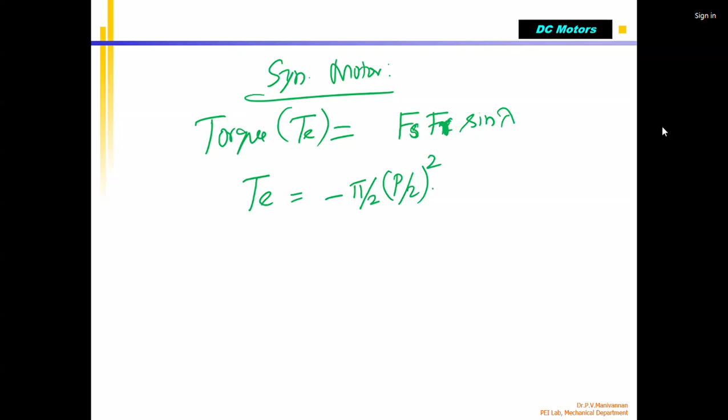Fs multiplied by Fr multiplied by sine of lambda. Already we know what that is. Now, if you want to write the final formula, TE can be written as pi by 2 into p by 2 whole square multiplied by phi R. I am using capital R.

Please see here, this small r. Fs multiplied by F small r into sine lambda can again be written like this. Phi R is the resultant magnetic field, capital R, multiplied by Fr multiplied by sine delta subscript r, so many Newton meters. Already we know the unit is Newton meter.

So this can be written again. TE can also be written as pi by 2 into p by 2 whole square into phi R, Fs sine delta S also, so many Newton meters. Both are the same, because if you see the figure, the total angle is called lambda.

The total angle between the stator magnetic field and the rotor magnetic field is called lambda. The angle between the resultant magnetic field vector, this is FR, the middle one, and the stator field is called delta S. Similarly, the angle between the rotor magnetic field and the resultant magnetic field is delta R. So there are three angles you will generally see in this figure.

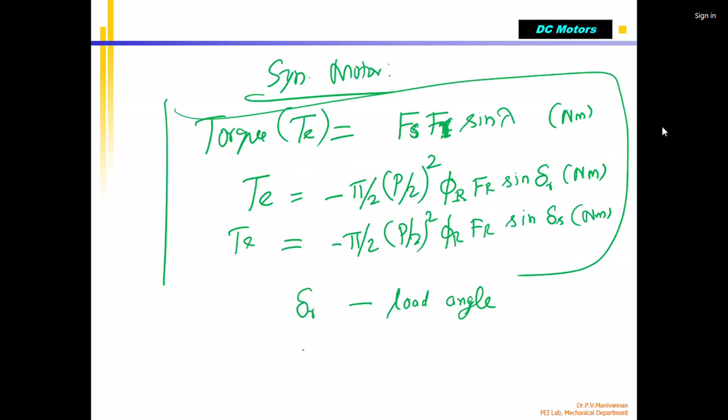One is lambda, then delta R and delta S. Based on that you can write the final equation. You can use any one of the equations to compute the torque generated by the motor. That is one thing. The next thing is, delta R is called the load angle, and delta S is also called the load angle, because it is with respect to the resultant.

The load angle is measured either with respect to the stator and resultant magnetic field, or between rotor and resultant magnetic field. Both formulas are the same, so you can use either one. In one we use delta S, in the other delta R - the angle between resultant magnetic field and rotor, or resultant and stator winding. Otherwise, we use Fr, Fs multiplied by sine lambda. This is called the load angle, or torque angle. Lambda is called the torque angle - note this down.

If you are given the torque angle value, Fs and Fr, you can compute the torque of the synchronous motor using this formula. Instead, if you are given delta R or delta S, and phi R is there, P is number of poles, pi is constant, then you compute using this formula. This equation can be further written as minus pi by 8 into P square, since P by 2 whole square is P square divided by 4, and denominator already has a 2, so 2 into 4 is 8. That's why it becomes pi by 8 into P square into phi R, Fr, sine delta S, or you can substitute delta R - this also gives the final result.

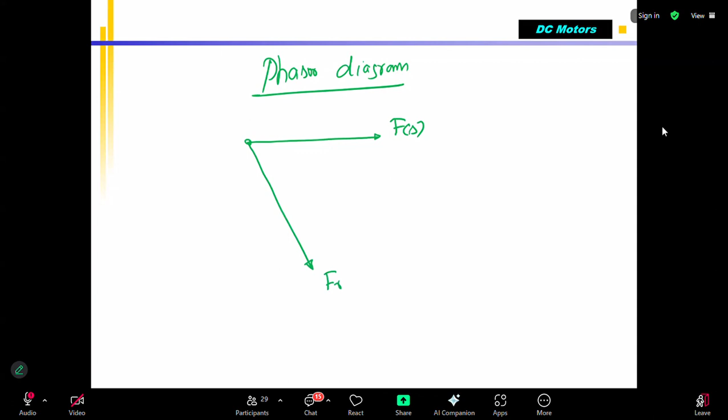Before closing, I want to cover this. Generally when we talk about this kind of AC motor, there are two magnetic fields working. How do we compute the resultant magnet? They use what is called a phasor diagram to explain the motor working and torque generation. For example, the stator magnetic field is denoted Fs, shown here. Then my rotor magnetic field, this is my Fr. Then the resultant magnet is going to be like this.

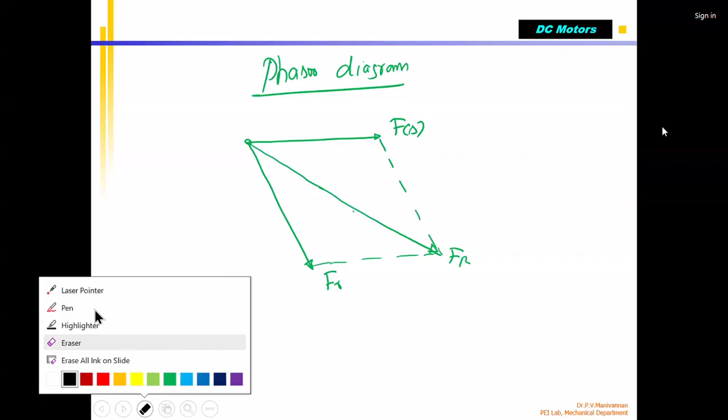So generally these two... let me redo this. The resultant magnetic field is going to form a parallelogram. So this is our Fr. And as I told you, this angle is lambda, called the torque angle. Then the angle between this is called delta R, and similarly this is called delta S.

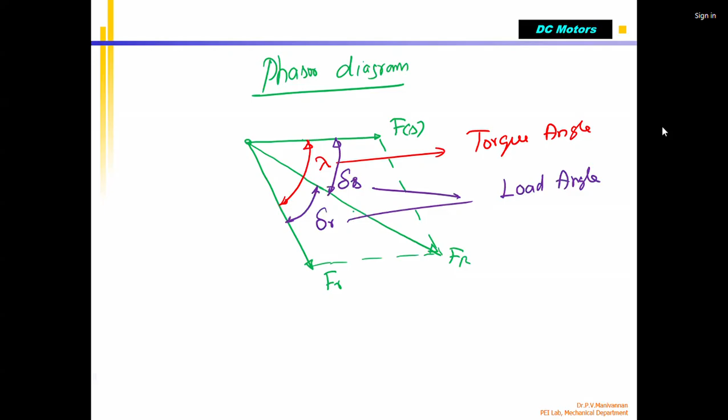Both are called load angles. Load angle means - if you recall the motor working as already explained - the rotor is connected to a load. The load has mass, so it has inertia. So the rotor wants to rotate along with the stator magnet, since it is a magnet. The rotor magnet is locked with the stator magnet, and the stator magnet is rotating - a rotating magnetic field at synchronous speed. So it has to go, but because of the load, the rotor cannot catch up.

If I see the magnetic flux generated by north and south pole - this is the rotor, this is my stator, in which there's a north pole and this is the south pole. Between these two, the magnetic flux generated is attracted - this should be south pole, this should be north pole. This magnetic field wants to go and join, get attracted - that means the rotor realigns, trying to catch. This fellow is rotating - both north and south pole rotating in the stator at Ns, and the rotor magnet wants to get locked with this, so it has to align exactly like this.

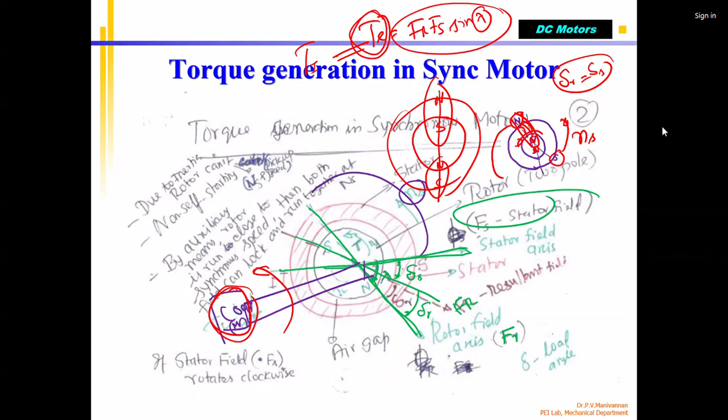Thus, when the inertial load is more than the torque generated, the motor stops. We call that stalling torque.

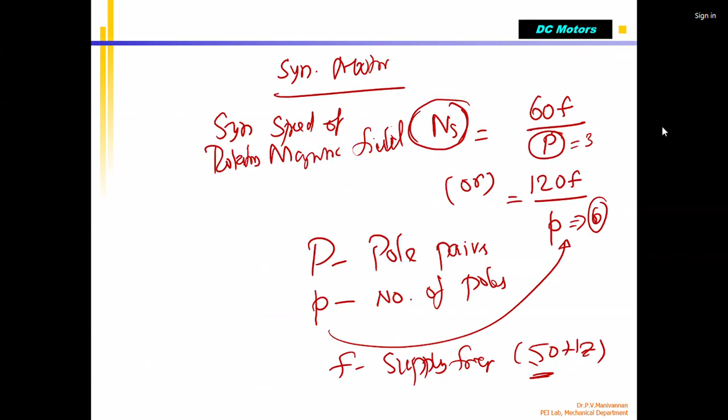Okay, so I have one question. Yeah, yes please. Can I ask, sir? Definitely. The equation that you have written is basically Fs into Fr multiplied by sine lambda, right sir? Yes, that is called the torque angle.

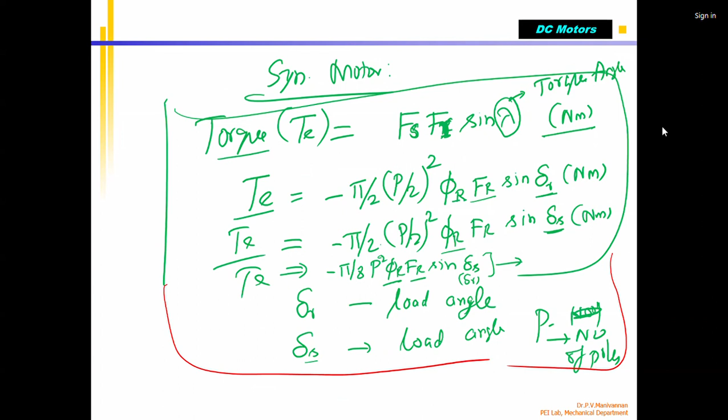Lambda is basically the load angle or torque angle, whatever you call it. Lambda divided by 2 because this load angle is different - this is called torque angle, lambda is called torque angle. This is the torque produced by the motor. Load angle is delta.

Right, so my question is - yeah, please. Okay sir, so my question is that when the fields are aligned completely, what I mean to say is when the stator is exactly in phase, like there is no... Then this will be zero, I would say lambda will be zero. The torque will become zero.

Motor will stop. Yeah, I understand where you are going. Correct, if the angle becomes zero, there's no torque produced. There is always something because the stator magnetic field has no mass, but the rotor has a mass. Correct, because always there will be an angle.

In no-load condition also, this lambda torque angle will not be zero, because the rotor has some mass. That angle exists because it cannot exactly align, because it is always trying to catch up.

That's why I told you, to start the synchronous motor you have to rotate the rotor physically, because it's already magnetized - you give DC voltage, north and south pole is there. You rotate this close to synchronous speed, correct? The rotor is rotated using an external motor, so that at one stage it will catch and align.

But even once it catches, because of mass - you remove the starting motor, but the rotor still has mass - rotor mass, because of that, it will lag. The speed will reduce a little bit. So never will this become zero. If it becomes zero, the motor will not be able to produce torque, correct?

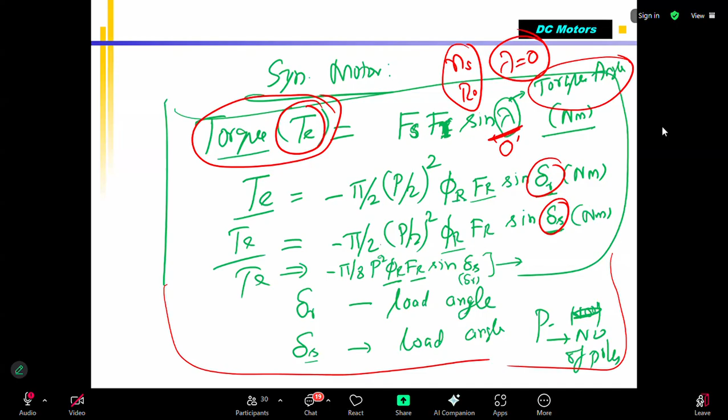So there will always be a little lag - the rotor mass itself acts as a load even in no-load condition. In actual load condition, because of that, lambda will become more and more, correct? And that divided by 2 is going to give the load angle - load angle resultant plus this one, that's what we are talking about. Thank you for asking that question.

Okay, so now that you know the formula, Fs we know, correct? Now I want to draw how the torque, power, and speed curve looks. Generally, when we talk about motors, the x-axis will be speed, generally omega in radians per second, correct? Angular velocity represents omega, correct?

From this, now I want to draw what will be the speed-torque curve for this. So one curve is called the torque curve. For a synchronous motor, the torque will be like this.

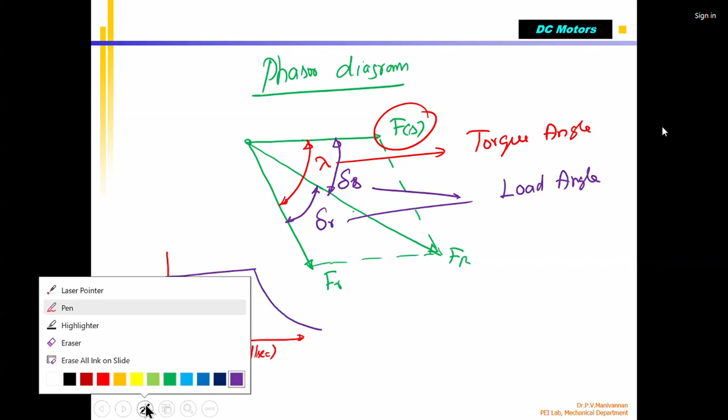This is the TE, torque generated by the rotor. After that, you have frictional torque, bearing torque, all those things going to consume. Resultant torque only going to drive the load. That we'll see.

As synchronous speed, already we see that this speed is called W base. And as you increase the load, this one goes on increasing. So at one stage, load becomes more, then the motor will stop. That is called omega max.

You can see that from 0 to W base, the speed-torque remains constant. I told you it can take load up to a particular phase. Once it becomes more, the speed starts dropping. At a particular load, then it will stop. That is called W max.

The x-axis we are talking about is speed of the motor, in omega radians per second. Y-axis we are talking about power as well as torque, drawn on the same axis. For synchronous motor, I have drawn the torque curve in violet color. The power curve will go something like this, for the synchronous motor.

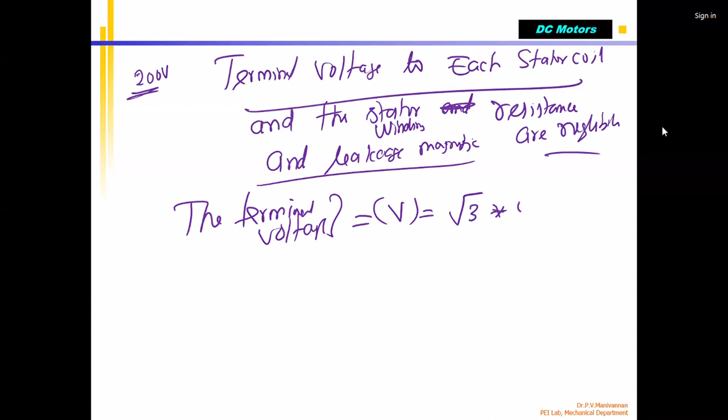So when we apply a fixed voltage, and the stator winding resistance and leakage resistance are negligible, very small value, then the terminal voltage can be written as V equals root 3 into 4.44 into Kw, because everywhere the multiplication factor is there, multiplied by F into phi R into NPH.

Since root 3 comes in, this is a three-phase motor, root 3 is a constant for three-phase motor, and 4.44 also is a constant. Kw is the motor-related parameter. If these parameters are given, then you can find the terminal voltage.

So now finally we can write T, torque generated by motor, equals K into delta R. Delta R is nothing but the load angle, sine of delta R, into K, where K is called the motor constant. It depends on pi by 2 into number of poles, phi R.

For a given motor, the manufacturer may give the motor constant, as synchronous motor. Once that value is given, you only need to know the delta R, or which is same as delta S. Multiply it by sine of delta, you will get the torque generated by motor. This is how you calculate the synchronous motor torque.

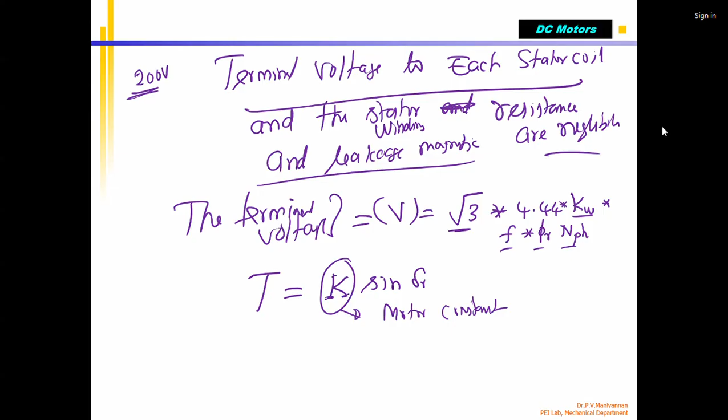Okay. So the curve is going to be: torque is in the x-axis, starting from 0 to T max, the maximum torque the motor can produce. Then this is the speed of the motor. The maximum speed it can reach is ns. You know that, correct? A synchronous motor can reach 0 to ns.

This is the maximum. So it will maintain speed until the load torque becomes more than the maximum torque, correct? This is the maximum torque. Then speed will become 0. You can see it suddenly drops. Theoretically, speed is maintained constant from no load, the no load condition of the motor, to the maximum load condition T max. Up to that max load condition, the speed will remain constant.

Even as you are putting more load, the torque will be generated by the motor. And once the torque reaches T max, after that, if you try to load, what will happen? The motor will stall and the speed will become 0. That's what this represents. Okay.

So where is the application of the synchronous motor? Main thing is, wherever constant speed is to be maintained, even when load is varying from no load to maximum load, correct? Where a constant speed drive is needed, you will use a synchronous motor.

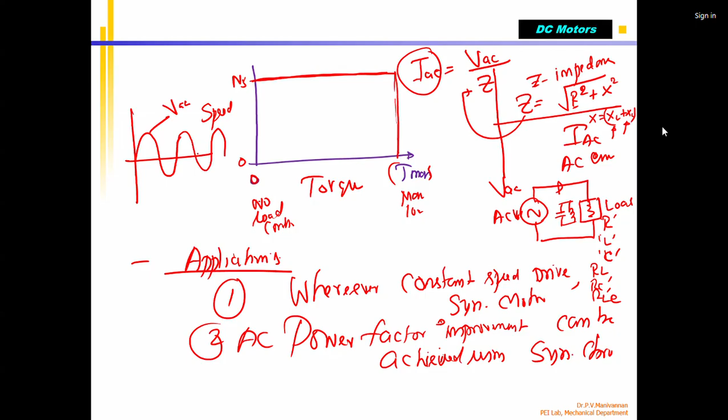Once IAC, but the problem is, I am applying the AC voltage, which is sinusoidal, correct? Generally we represent this as my VAC. This is my time axis, T equal to 0. This is the amplitude, plus V, minus V. And how will the current flow through a resistance load? If the load is a pure R only, the current will be like this.

You can see that there's no phase angle. Voltage and current are aligned, but amplitude differs: this is my IAC, this is my VAC. The shape is also sinusoidal, and it is in phase. This is 0 to 180 degrees, 180 to 360 degrees, one cycle. You will say current and voltage are in phase. In the best case, only the amplitude will vary, but they will be in phase.

If it is inductive, this is my VAC, IAC. I say that it is inductive, right? Then what will happen is the current will be like this.

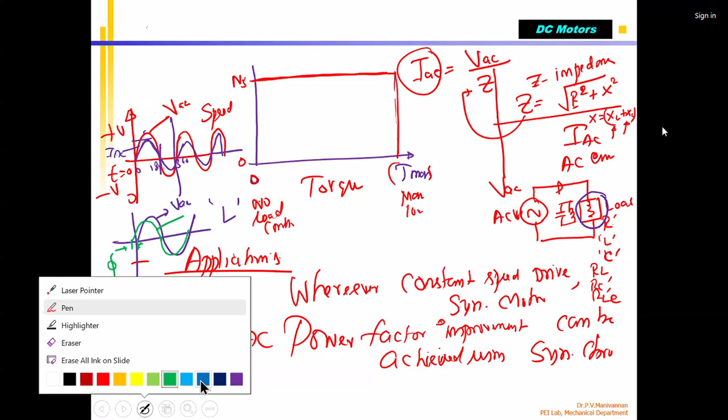Okay, so it will be. So now you see that there's a phase angle. This is called phi, which is called the phase angle. Okay, this is for inductive load. Instead of that, if I have a capacitive load, my voltage is like this, my current will be flowing like this.

So this is my IAC, this is my VAC. You can see that there's a phase angle, phi. Correct? This is called a lagging phase angle. This is called a leading phase angle. Inductive load, there will be a phase difference, apart from amplitude difference, but with a resistive load, both will be in phase.

And if you have an RLC circuit, depending upon R value, L value, C value, the Z changes. When the Z changes, automatically a phase angle change also happens. There's a formula for that. But generally, in AC, both voltage and current should be in phase. That means there should be pure resistance. The denominator should be a pure resistive load.

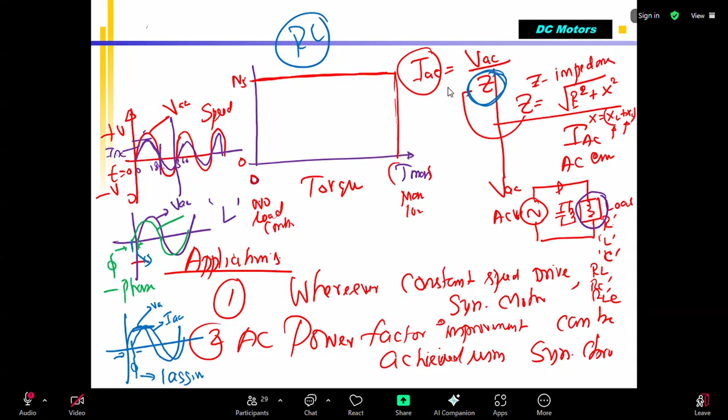But a synchronous motor has a coil, so it has inductance. Coil is made of copper wire, it has resistance, so it is called an RL circuit. Even though it looks a simple coil, all motor coils here, armature coil, rotor coil, stator coil, field coil, are all copper wires. But once a straight wire is wound as a coil, it attains L, inductance comes. And since it is made of some material, copper, aluminum, it has resistance also.

So a coil cannot be considered pure inductance. A motor coil should be considered an RL circuit. Because of that, a phase shift happens. If more phase shift happens, we get what we call reactive power. If phase angle phi becomes more, reactive power increases, and that is not good. Active power is the only measurable quantity. So the phase angle should be reduced.

So if you have an inductive load motor, I have a coil which is represented by resistance together, and I add one capacitor. This is my actual load connected to AC power. A voltage is applied, IAC is flowing. Because of it, there's a phase angle, and reactive power comes into it. We say VAC multiplied by IAC into cos theta, where theta is the phase angle. So PAC equals VAC multiplied by IAC multiplied by cos theta.

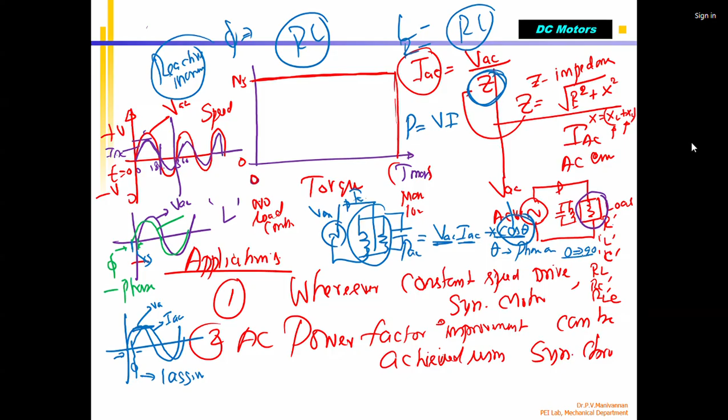But in case of pure DC, P equals V into I. This cos theta factor will not come. Cos theta is represented as the power factor. Theta will vary from 0 to 90 degrees only, so the cos value will vary from 1 to 0. If cos theta becomes 0, the power is called pure reactive power.

In case of pure resistance, theta will be 0, cos 0 equals 1. That means if I connect a resistive load to AC power, it works as pure active power. Power factor becomes 1. But in case of a motor, the angle will not be 0. It can vary from 0 to 90. Because of that, there will be reactive power, which should be compensated. How? You have to make theta equal to 0.

What I do is, across the motor, I add one capacitor. So in your fan motor, there will be a small capacitor. It's a starting capacitor, they say. That is to reduce the phase angle, so the power factor improves. So a synchronous motor can be used for making theta equal to 0. The power factor angle should be 0.

So in big factories, for example a plant, maybe hundreds of motors, then tube lights which have chokes, then fans to circulate air in the factory. That means a lot of inductive loads are connected. In that case, the power factor will become lesser and lesser. So to stop that, they put capacitor banks. Otherwise, they can put synchronous motors.

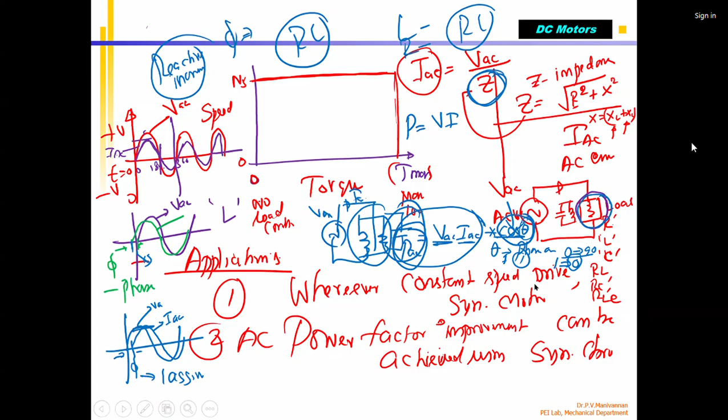Pradeep, can you please mute your... Pradeep, listen to this class. Don't listen to some other class in parallel. You won't understand both. You are seeing some video or some lectures. This is not going to help you in your exam. Beyond that, I am not going to say anything.

Okay. The last thing I want to say is, there are two types of synchronous motors. Note down. Synchronous motors are of two types based on the type of rotor. I already told you, I draw the stator body, in which you have coils, three-phase wires, embedded.

Three-phase AC, this is my stator. Correct? Stator coil, stator body is made of laminated core, and you are supplying three-phase AC voltage. Then you have a rotor. We are seeing a cross-section of this one, in which again there are coils. I am saying just some 4 sets of coil. A coil is there everywhere, and current is entering like this. Since this is a cut section, we are seeing current entering into the coil, and here it comes out.

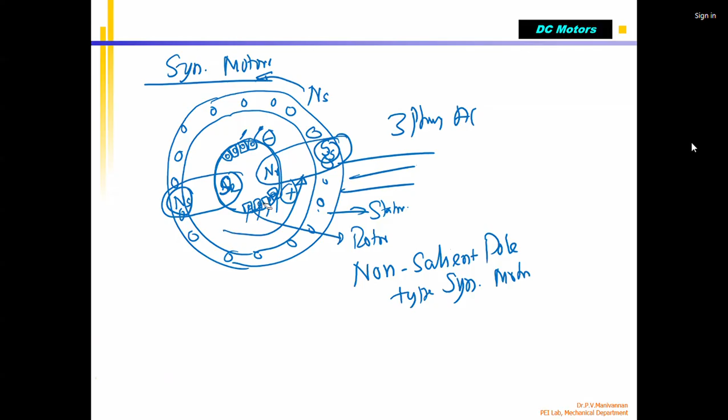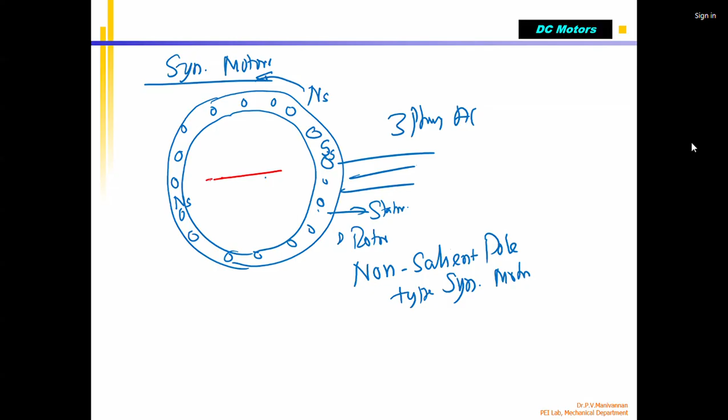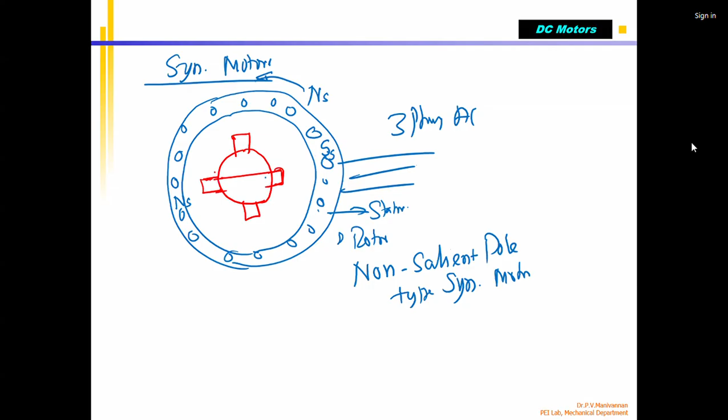Okay, other than this one, the other one is called salient pole type motor. Okay, so circular in shape, but there are projections. Many times they show it like this. Coil will be wound over this. These are called pole pieces, correct? Please note that in the non-salient type also there were poles. Poles are created by the current flowing through the coil of the rotor, but it was cylindrical shape, no projection, with grooves in which the rotor coils are embedded.

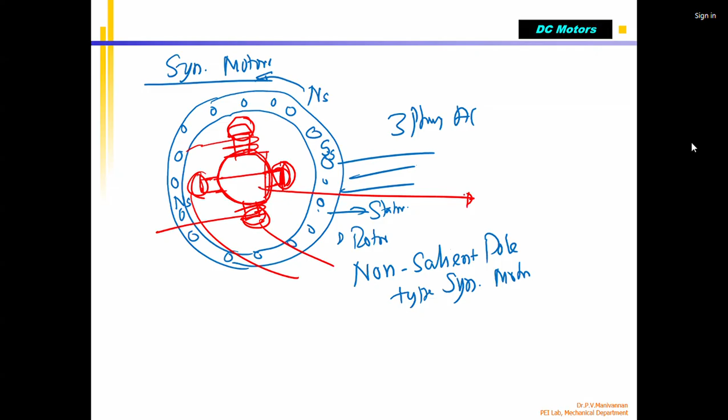Okay, in this case, you can see that this is cylindrical, but there are projections, correct? And the coil is there. This type of rotor is called salient pole type. Poles are projecting from a cylindrical shape. From that, there's a projection, correct? So this is called the salient pole. And both types of motors are available, correct? They have some advantages, also disadvantages.

I think time is already up. Maybe I close this. Maybe just another few minutes.

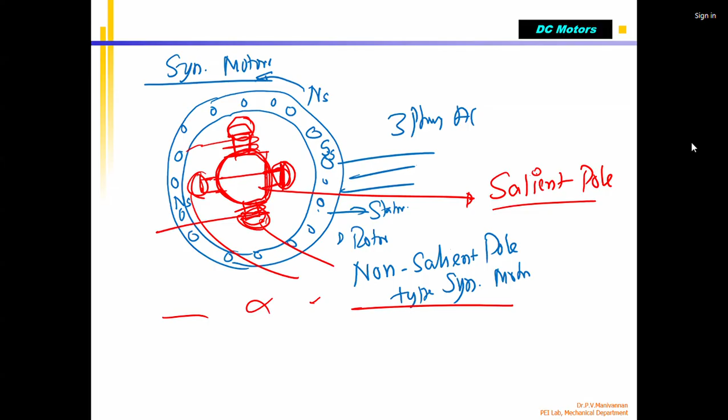I will close it. So both types of synchronous motors are available. Salient type, in which the rotor poles are projecting outside and coils are there. Of course, the main part is a solid cylindrical shape, but there's a projection. This is called salient pole. In the other one, the rotor has no projections, cylindrical solid with grooves, and that is called non-salient pole. There are some advantages between both. Okay, I will draw the advantages. One is called non-salient pole type, note down, the other called salient pole type.

First thing is the rotor diameter. The non-salient pole has a smaller rotor diameter. What I'm saying is, generally it will be in cylindrical shape, right? So this is the shaft coming out. There's a bearing, right? Here there are grooves, right? The rotor has some length and it has some diameter also.

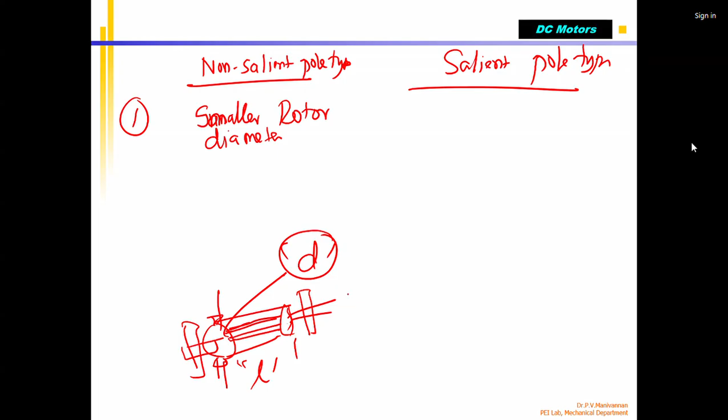Correct? So the non-salient pole motor has no projections, and it will be smaller. The diameter D will be smaller for the same power, same torque compared to salient pole type. Non-salient pole, the diameter will be small, but the rotor length will be longer. So smaller diameter, longer length. Okay.

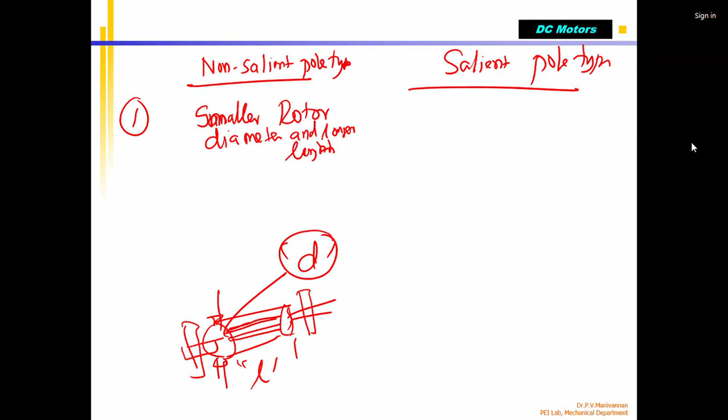Then there's a uniform air gap, correct? I told you this is my rotor, this is my stator. There's a gap in between, correct? Because this is a cylindrical shape, there's a uniform gap, so air will be sucked in. I told you there'll be a fan attached to this, and it will suck the air to cool the motor. Air will be going like this in the gap. So since there's no projection, both the stator and rotor are cylindrical with a gap, the windage losses.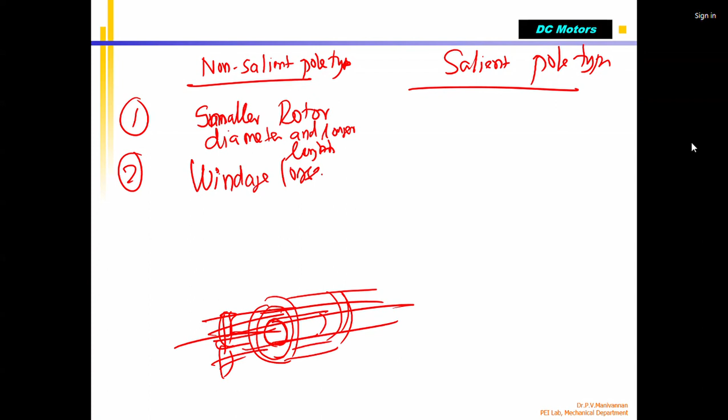Because air is sucked in, correct? Air is sucked in by the fan and comes out, correct? That is going to smooth the gap and cool this one. So windage losses will be less because there is no projection. We're not going to create turbulent airflow. Windage losses will be less.

Okay. Then it is a robust construction, correct? Please note that it is a robust construction because it is a solid cylinder with grooves only, no extra projections. So when the rotor rotates at 2000 RPM, 3000 RPM, the centrifugal force created will not have any effect, correct? It is highly balanced. So robust construction without any projection. So it can run at high speed, correct?

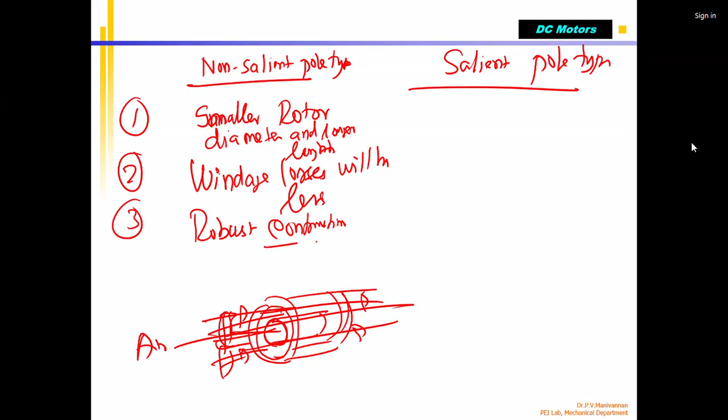Non-salient pole synchronous motor generally 3000, 5000, 6000. But please note the speed. NS equal to 120 F divided by small p, correct? So you can give higher frequency to attain higher speed, 3000 RPM, 5000 RPM for a given number of poles, correct? So 120 is a constant. If I vary the input supply frequency, I can go to any speed. For a given supply frequency, it maintains a constant speed, correct?

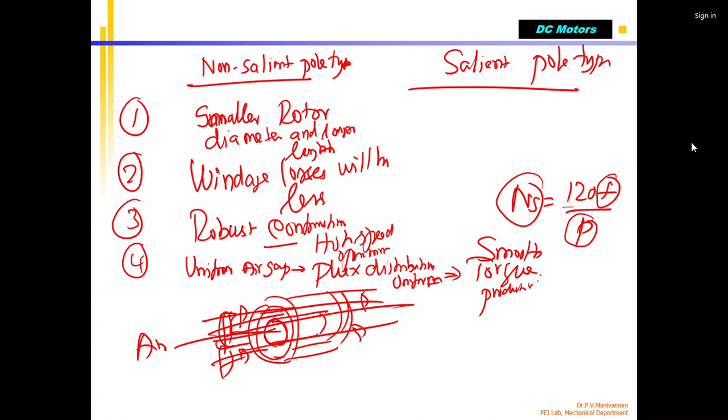So since there are no projections and robust construction, high speed operation is possible compared to salient pole because there's a projection. Okay, then the last one is because uniform air gap is there. Due to uniform air gap, correct, flux distribution will be uniform. Because of that, torque production will be smooth. As the rotor rotates, the torque is going to be smooth torque production or uniform torque production at any given angle because there is no projection.

Okay. Then, as I told, high speed operation is possible, correct? Generally a high speed synchronous motor will be a non-salient pole. High speed operation, because it can withstand higher centrifugal force. Since there's no projection, it is a solid uniform shape, it can withstand. So for high speed operation, you have to go for non-salient pole type only.

And again, last one is well balanced. Mass balance. Being a cylindrical shape, correct? It is well balanced and minimal vibrations. Okay, this is the advantage of non-salient pole type. Okay, so what about this one?

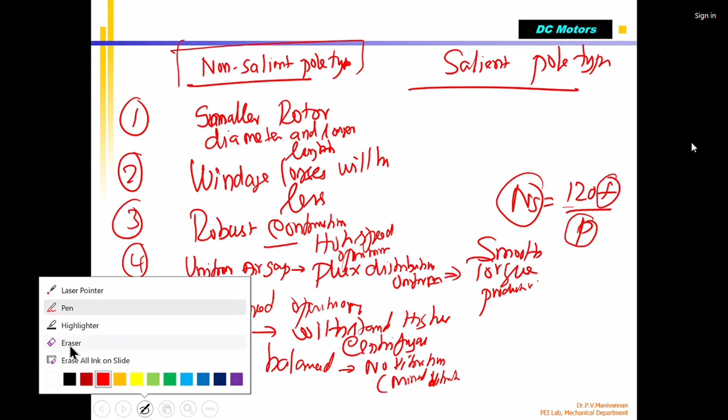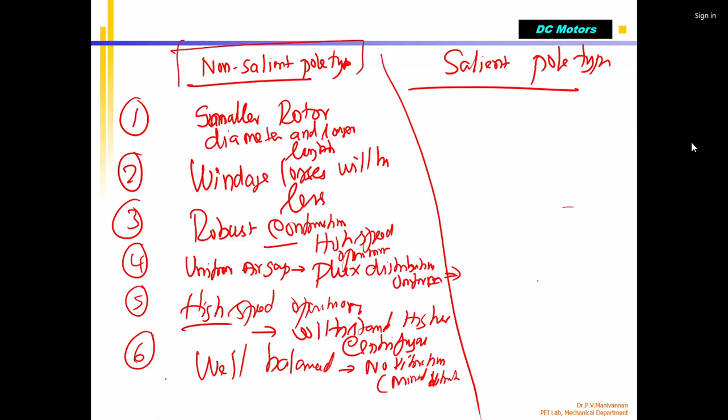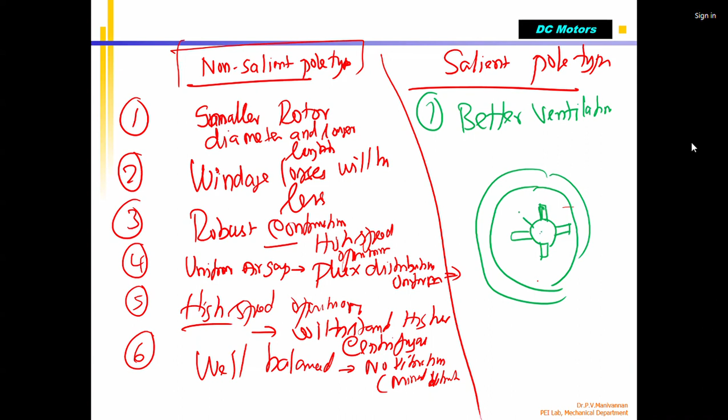Salient type, better ventilation. Because there are projections. I told you, I have the rotor, there are projections. And this is my stator. Correct? Because of projection, a large gap will be there. This is air gap, correct? So that means more air can go. Better ventilation is possible. Cooling will be better in salient type.

And of course, it has a drawback. It will be a larger diameter. The motor size will be larger because of the poles. Then third one is the pole faces. This is my pole face, correct? The projection they call pole pieces. The face will be shaped such that the magnetic flux is uniformly distributed. Okay.

Generally used for low speed operation. Because as I told you, poles are projecting. If you run at higher speed, it will experience a lot of centrifugal force. The pole pieces can create a lot of centrifugal force. At higher speed, the motor can break. So generally they recommend low speed operation, in order to avoid higher centrifugal force created by the projected pole pieces.

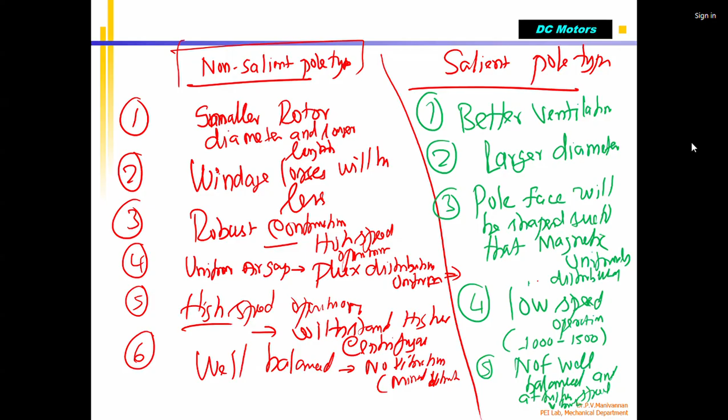I stop here. Tomorrow we will start the most widely used, the induction motor. Induction motors are very rugged. It is another type of AC motor with a lot of advantages, used in electric vehicles, agriculture, industry, wherever you want constant speed AC motors with rugged construction and minimal maintenance, they go for induction motor compared to synchronous motor. We'll see that in the next two classes. Then we will talk about power electronic circuits later.